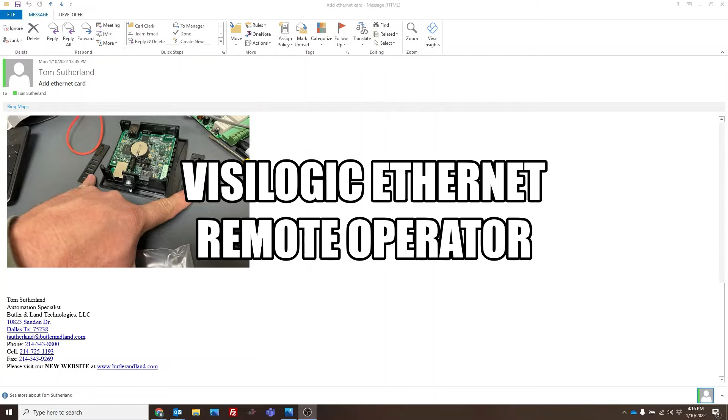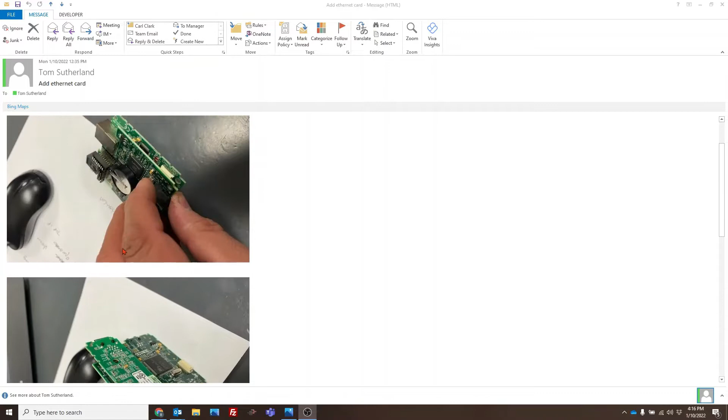So depending on the model you have, you may have to take your Samba apart to add the Ethernet card, and on this one, removing these sides made it a lot easier to put it back together. So you take the cards all the way out, and this is the Ethernet card on the bottom. It snaps into the bottom. This is the connection point. Snaps together. There's nothing holding those together but that connection until you set them back in here.

I think it was 2 screws I had to take out. It was just 2, here and here. There's only a couple screws that hold it in, and then you reinstall the plastic sides and you install the piece over this. It kind of helps hold it together. To remote view a VisiLogic Samba with the Ethernet card installed in it,

the first thing you'll need to do is go to the unitronicsplc.com website and go to software, VisiLogic, to download software utilities and Remote Operator. So you want to download this and install it. And the next thing, in your VisiLogic program, you need a couple of lines of code. Let's see if we can get them up over here.

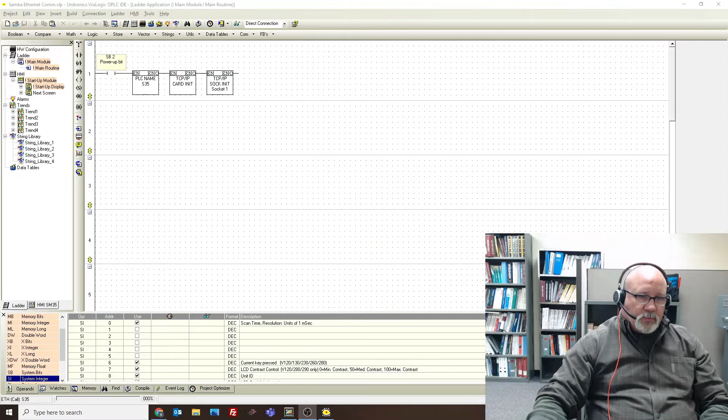So in VisiLogic, you'll need to add this system bit, which is just a normally open looking contact. And when you drill down to it, it shows you SB2, which is system bit 2. Display's kind of goofy here. SB2, according to the documentation here, is a power up bit. It only runs the very first time you power on the PLC. On the first scan, it runs this rung. It's the only time it needs to run.

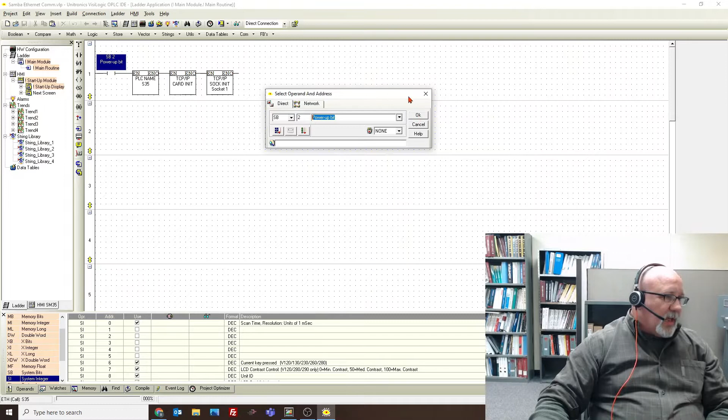But it's also important to remember, if you make any changes on this line, when you download, you need to do a stop download reset in order to rerun this line. If you just do a regular download, it will never run this line again. If you do a stop download reset, it will run the line. So this open contact I set as SB2, system bit 2, and then I dragged these blocks over here from the COM selection.

So the first one is the PLC name. You can name it whatever you want. It's case sensitive, so I just call it S35, or Samba 35, direct string, and you say OK. The next one I dragged over was this TCP/IP card init, and that's where you set the IP address, subnet mask, and the gateway. And the last thing you set is which socket you're going to use.

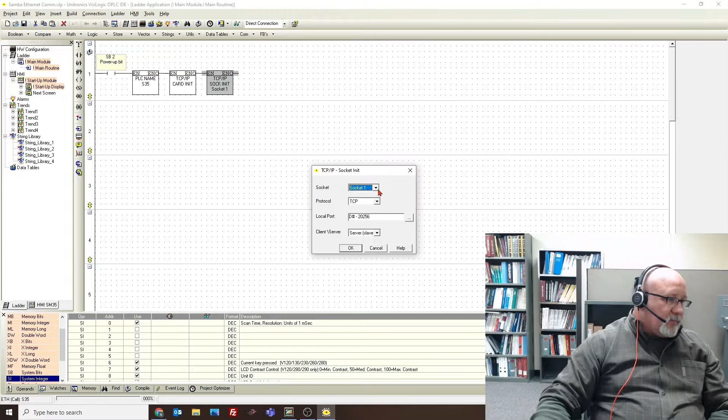For TCP, the standard setup is socket 1 and socket 3. So socket 1 TCP, and it's 20256. And you're setting this up as a slave device. And if that socket were busy, you could set this up as socket 3, 20257, which also works. You'll be connected with your regular USB or with the RJ12 plug at this point if you have to install the Ethernet card. So you would connect and go ahead and download it with your regular connection method.

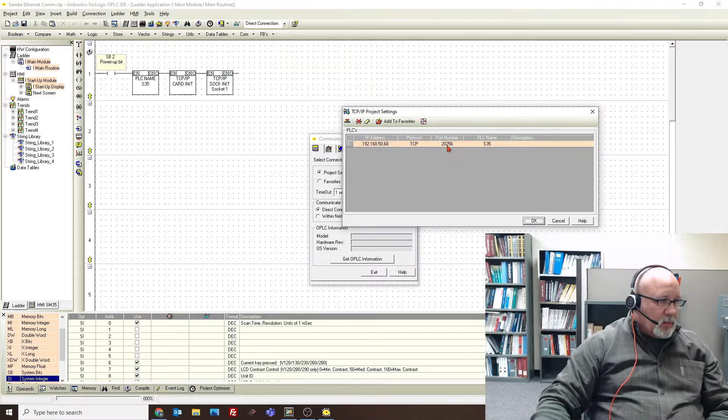Then next time you connect to it, you would be able to change it from serial to TCP call, and you do have to use the name that you chose up here for the name here. You need to remember the IP address that you put in up here, so 192.168.50.68, and you have to remember which socket it was on, so the socket and port address is here, and you do have to put the name here. Again, it's case sensitive, so you would say OK to that.

And then if you're in call, you have these two things set up, and you do get OPLC information, it should connect. So you have to be careful and not have the remote access running. I tried to connect to it, and it wouldn't connect because that socket was already attached to by the remote. So let's try it again. Go to comms. It's TCP call. The name's correct. Already should be set up. If I say get PLC, it should find it.

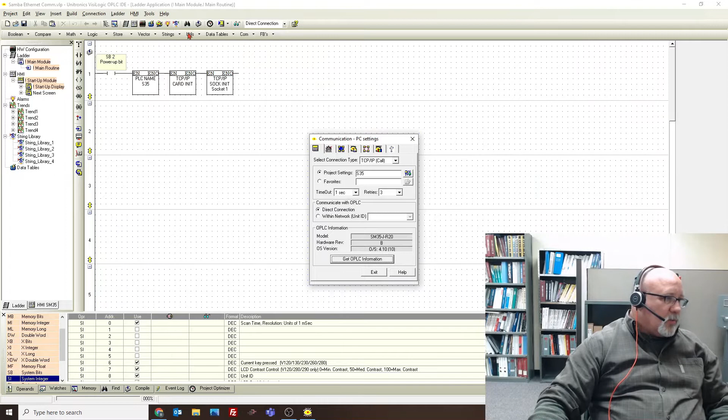It did this time. So it did download the correct Ethernet settings, and now it's talking to it. But if you have anything else that's already talking on that port, this won't do it. It'll lock you up. That's good.

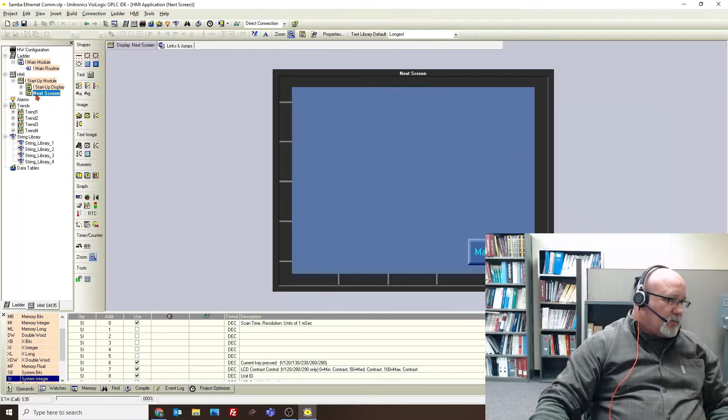And so just to be able to see that we're doing something, I made two screens on the display. So here's the first screen. I just put the name and the IP so we remember it, and if you press this button it should take you to the second screen, which is just a blank screen. You press that again, it takes you back. So let's look and see if this works.

So same thing, I'm going to get out of this so I'm not connected to that port anymore. So close VisiLogic. And then we downloaded the remote operator. So let me open that. So here's remote operator, and you're able to add PLCs here and rename them as well. So you would start off by adding a PLC, and you would go into it, which we'll do in a second. You should be able to delete these off as well.

So you would right click it and rename it. In this case, I can open the one that I already did, or we can just rename it. Rename. I'm going to call it this Samba S35. And then over here, this is kind of the connection settings that we need to give it the correct IP address. So it's on serial to start with.

We're going to do the Ethernet call, and it was 50.68, I believe. It's the IP address. The port is correct already for socket 1. It's TCP protocol. We do have to put the name in here. It was S35. And if this is all correct and I do check connection, it'll give us the information. So it did connect to it. It was able to read the model, and we know we have a good connection now. So we say okay, connection's established. You could save this at this point.

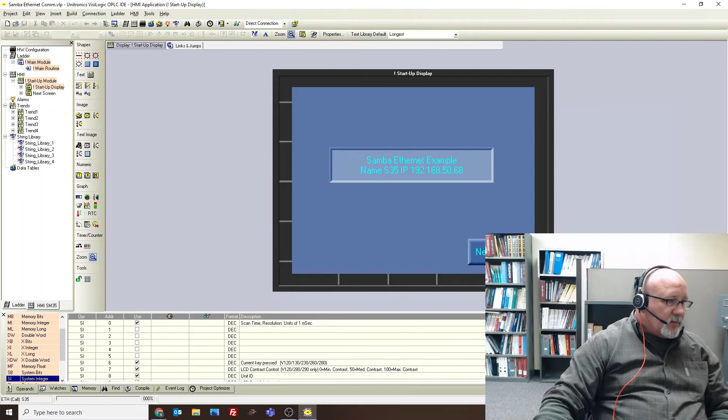So this was the start screen, and we wanted this button to move us to the next screen. So if I double click that button and I go in here to assign that button a bit, I'm going to assign it to MB 100, and you can put a description there. So I want it to take me to the next screen when MB 100 is made.

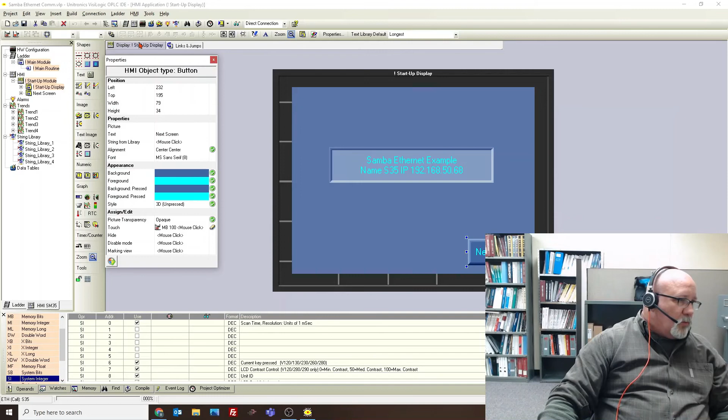So you see under this, in the HMI, under the particular screen you're on, you have links. So in links, I typed in MB100, description came up, and what do I want it to do? I want it to load a screen. I want to load next screen. And so now when you push the button on the HMI, you're changing the state of MB100 or 101, and it navigates you to the next screen.

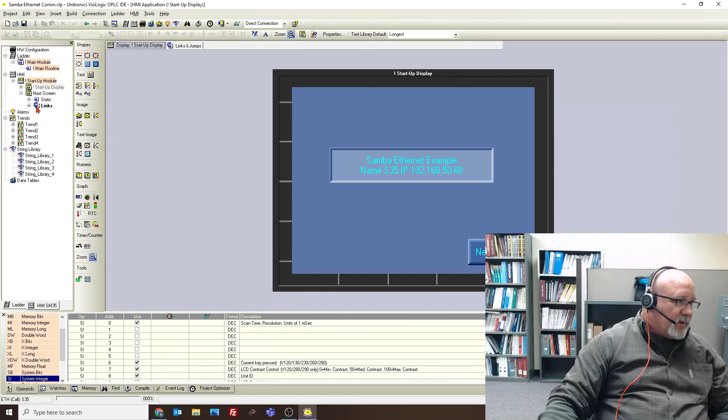So if I look at the second screen here, look at this. If you press the button, MB101, it's gonna change the state. If we look on the links on this screen, MB101 will take you to the startup screen, so it navigates you back to the startup screen. That's just one way to navigate through the screens.